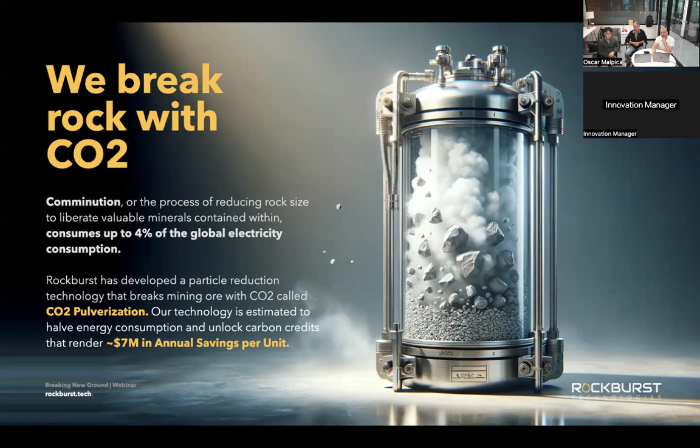Again, for this audience, you're pretty familiar with what you see on screen, but what we are trying to do is, in a way, replace mechanical comminution. This is a long-term objective, but nonetheless, we believe that this is the future of comminution in general, not just in the mining industry, but outside of it.

The opportunity is huge for all investors out there in the audience. This is at least a $30 billion annual global opportunity.

This is a summary of what we normally present as our key benefits in terms of what our technology can deliver. Energy savings — we have some early estimates of around half energy savings compared to ball mills and SAG mills. Cliff will explain a little bit more about where exactly we are in terms of these estimates.

This translates roughly into potential to decarbonize the mining industry around 3 gigatons per year. This is considering that we use CO2 as a working fluid in our technology, and that CO2 could also translate potentially into carbon credits, because that CO2 gets sequestered in the tailings of our process.

Again, you're seeing here early estimates, so please don't hold me to this just yet, but very, very positive indicators of where the technology could go in the future.

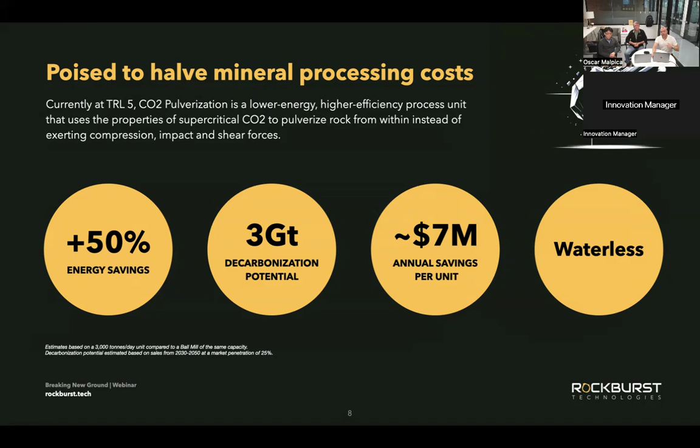So before we get into how this technology works, this is a quick video that shows the innards of some of the prototypes that we already have. If you haven't seen this video, it's just a 30-second video, but maybe we can have some commentary from the inventor of the technology, Cliff Edwards himself.

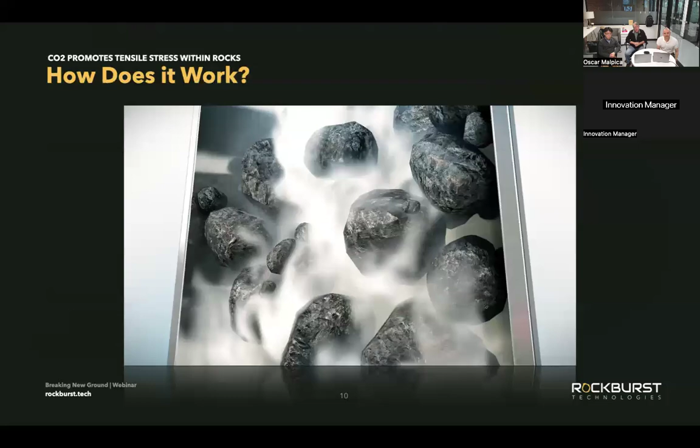Yeah, this is a very basic animation just showing, introducing the rock into a sealed chamber where you introduce the CO2 into that chamber and you permeate that CO2 into the pores of the rock in a supercritical condition. And then you rapidly decompress the chamber, which causes the pressure to increase inside the rock versus outside and fracture the rock. And thus you can turn your rock into your product size, and out comes the powder.

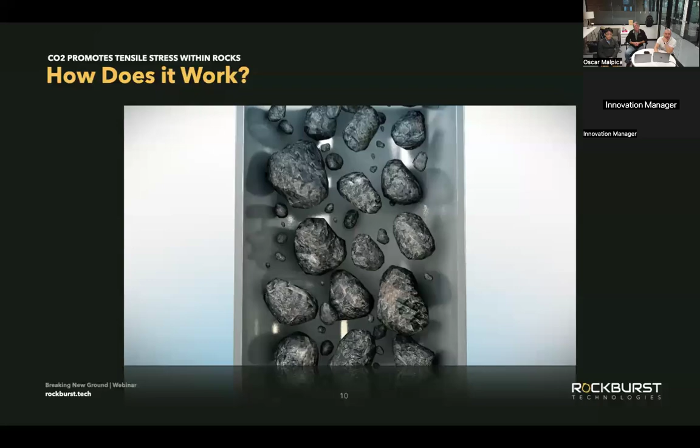Yeah, so once again, just to recap what you just saw here very quickly, what we're doing here is promoting tensile stress within the rock. And this is an important aspect because, again, rocks are 10 to 30 times weaker under tension than under compression. Again, for this type of audience, I'm pretty sure you all know this, but using this thermodynamic way of breaking rock, we're basically taking advantage of that fact of nature in a way.

Obviously, the devil is in the details in how to manage those thermodynamic levers that we have to move to get that breakage at the lowest energy threshold, relatively easily achieved in the lab. As you scale up, you have other nuances that we have to obviously take into consideration, and that is exactly what we're doing at the moment.

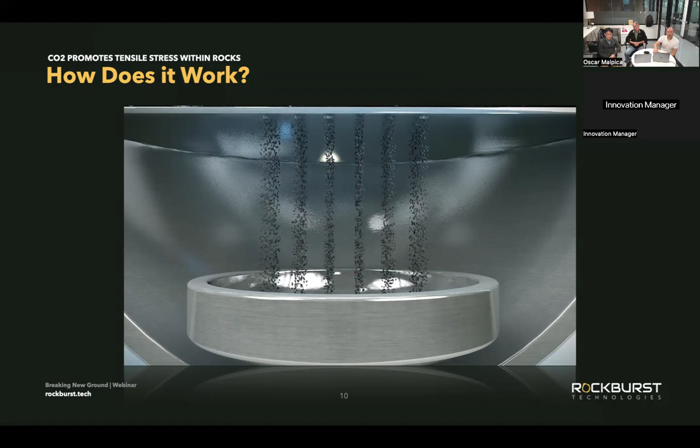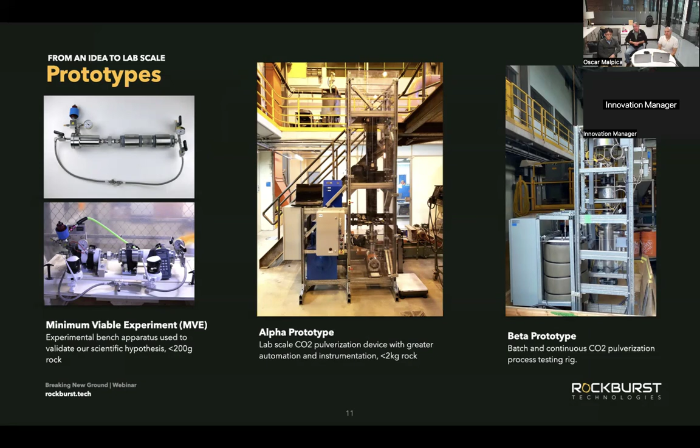But these are the 3 prototypes that we have at UBC, and you will see later down the road here that we have some results to show you in terms of what we have achieved for different types of ores. We'll be using the alpha and or the beta in the mineral liberation analysis program and study that we're promoting here, and those are the rigs that we'll use to do the comminution prior to doing the MLAs.

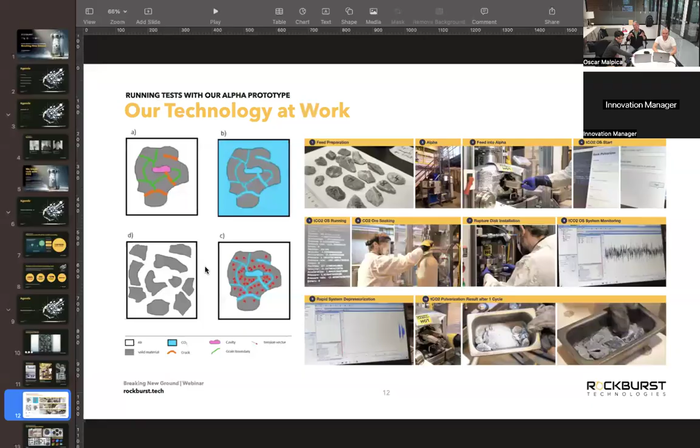And then in the next box, B, to the right, we show permeating with CO2, which works its way into the particle and through all those porous features. And then in C, we create, nope, on the right. Oh, yeah, sorry. So in C, we create the tensile stress by rapidly lowering the pressure around all the particles at the same time. And then the stress is created from the pressure that's still remaining inside the rock, as the gas hasn't had a chance to escape at the same rate that we decompress around the rock. Thus, in D, we fracture the rock along all those porosity features.

And then, if you want to zoom back a little bit, guys, you can see the test process on the right-hand side, where we prepare and characterize the feed. We load it into our test rig. We run our operating system for the test rig and add CO2 into the chamber. We prepare a rupture disk in the alpha, and then we run the system and do a rapid depressurization in the bottom left there, and then we vent the gas at this point.

Later on in commercial systems, we won't vent the gas, we'll recycle it. In this case, in the lab, we're venting the gas, and then we retrieve the sample, and then characterize the breakage results of the sample.

Yeah, one thing that we should probably mention at this point: this is obviously a batch approach that you're seeing here in our alpha prototype. However, we're studying different ways of converting this batch process into a continuous process. And the beta prototype, the next generation prototype that I showed in the previous slide, is allowing us to test certain aspects of continuous processes. So just to mention that this is an evolution of how we see this technology progressing.

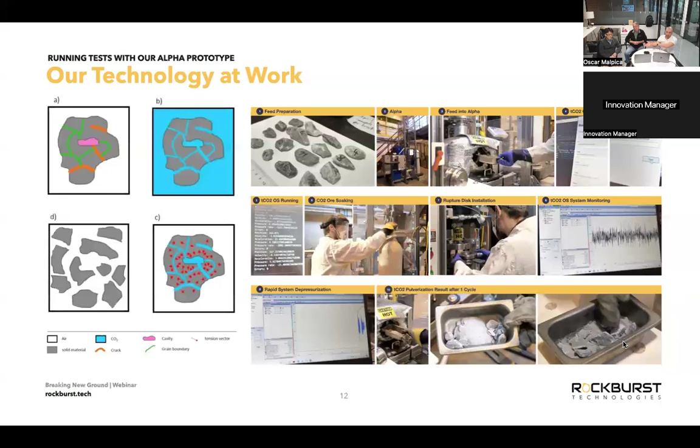And these examples are just showing one cycle of our process, where you put the feed in and you do that one breakage, a rapid depressurization breakage cycle, and you produce a certain amount of fracture across the size ranges, but some of that fracture is going to be at the product size that you want, say sub 100 micron. And then the oversize, of course, goes back in for another cycle.

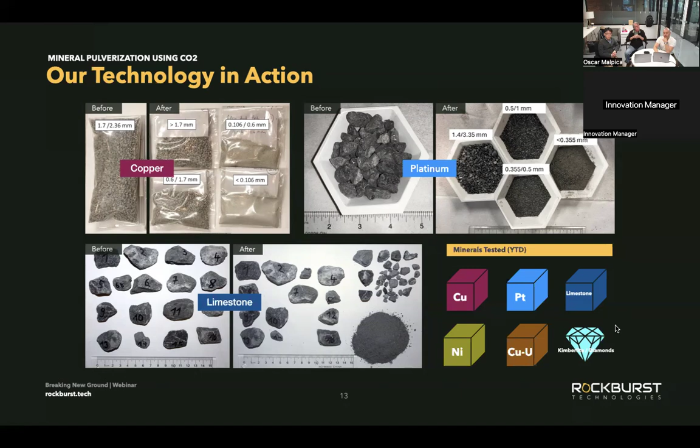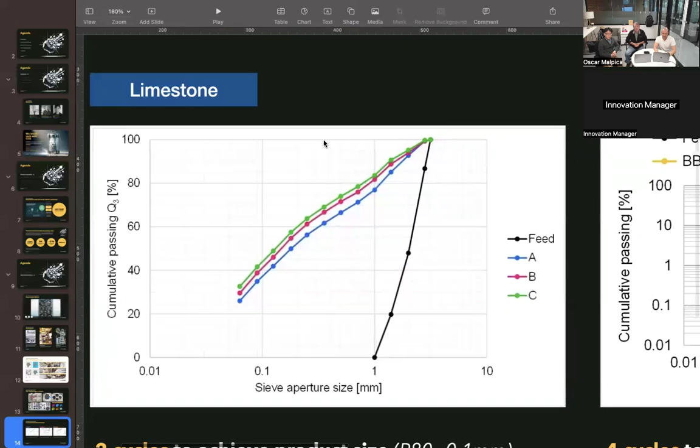This is an example of particle size distribution charts to back up the pictures of the products that we produce from the feed. These are intended to show our breakage performance. These are showing individual cycles. So each chart has a black line which shows the feed size, and these sizes are all produced by taking first the feed, the black line, and then the products, the colored lines from the tests, and putting them in sieving machines and sieving them at different sieve sizes so that the mass of the particles that pass through a certain sieve size can be determined and then charted here.

So you've got sieve size on the bottom, in millimeter scale from 0.01 millimeter, so 10 micron, all the way up to 10 millimeters. And then on the vertical axis, you've got cumulative passing. And that's just a common way of saying the mass of material that passes the sieve at that size.

So in this case, the feed was obviously 1 millimeter to 3 millimeters in size at 100%. And then the products from each of these three test cycles show that if you were targeting, for example, say a 100 micron or 0.1 millimeter size fraction on this chart, we're getting 40% of the mass of material passing that size pretty much for each test cycle.

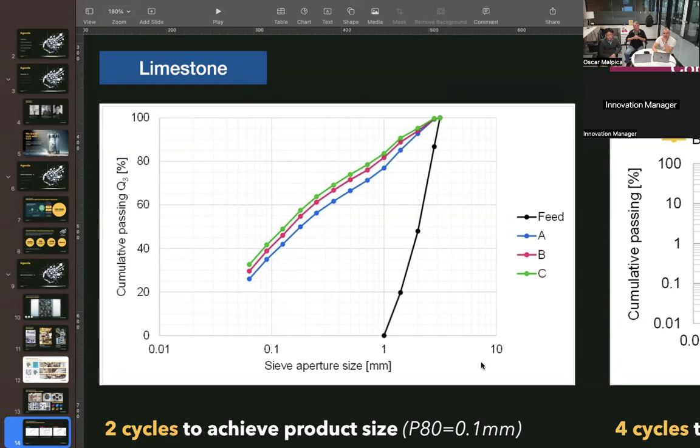And then the next chart is a copper example. And in this example, we've got the black line again showing the feed. The feed was actually 1.7 to 2.36 millimeter. It tapers off because the sieving itself produces some small amount of fine fraction. So you can ignore that long tail on the black line there. But the colored lines here represent 2 different test rigs.

So the blue line is our alpha test rig. It's an earlier test that we did with this material, showing about 2% cumulative passing at 0.1 millimeter. And then we show results from our beta apparatus on the same material, and you can see that it's pretty much a 10x improvement in breakage performance. So this is partly to give you an example of the comminution performance we get per cycle, but also to show the progression that we're getting with our generations of equipment. And the beta is not the end. We will continue to optimize and push these numbers up.

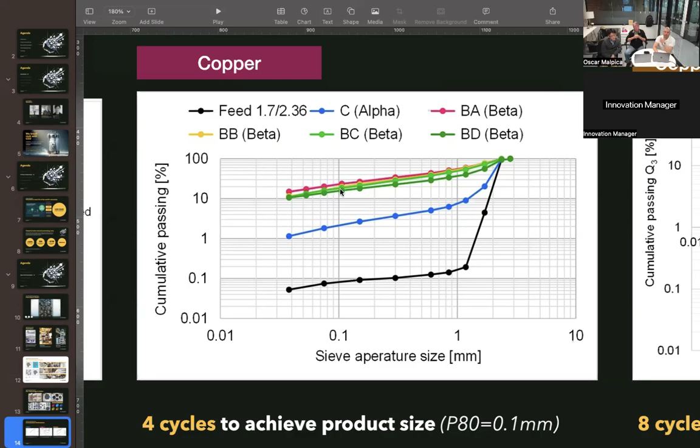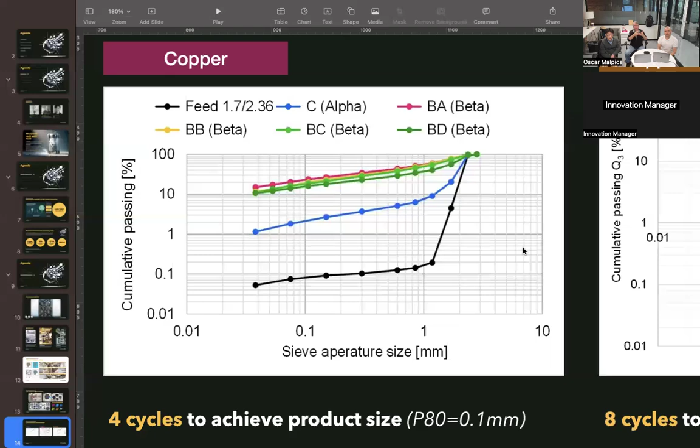It's a bit hard at this moment to translate this slide into an energy comparison with traditional means, but we model these results through a thermodynamic model we have of a sort of conceptual process at a larger scale, and that's where we're coming up with our estimations for energy.

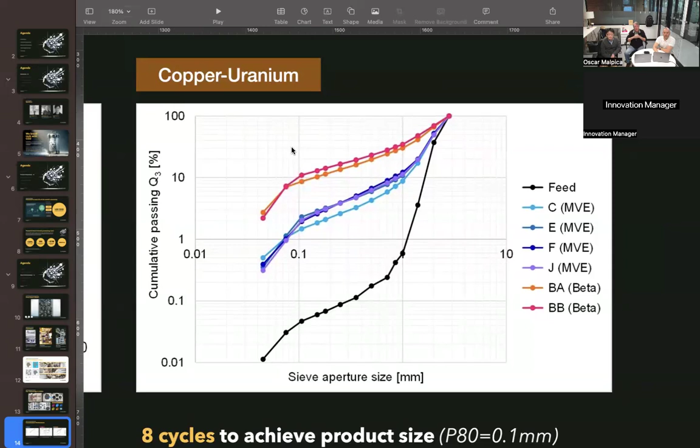So the last one here is copper uranium ore, very hard ore, quite challenging to break. The feed looks like it was essentially 1 millimeter to 3 millimeter roughly. And again, we've got an old test apparatus with that bundle in the middle of colored lines showing about 2% breakage at the 100 micron size. But then we're also showing the beta results at around the 10% mark. So in other words, again, with this one, to reach a P80 of 0.1 millimeter, you would need to run, say, 8 cycles, and that would push that up to the P80 mark. And for us, when we run these number of cycles and the pressure and temperature and so on through our thermodynamic calculator, we can see what looks like very promising energy results.

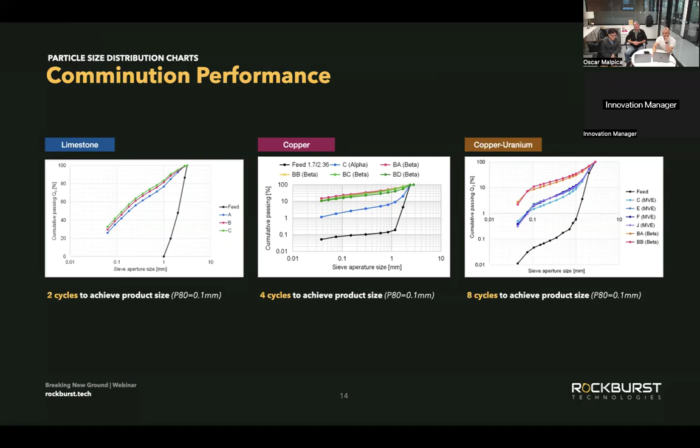Again, electricity consumption would decline. This is what we expect to see in large, scaled up systems. The devil's in the details; we still have to work with our engineering partners to make it so. And then you have, once again, dry comminution is the default mode of our technology. And there is the potential for carbon sequestration from our side because we use CO2 as a working fluid.

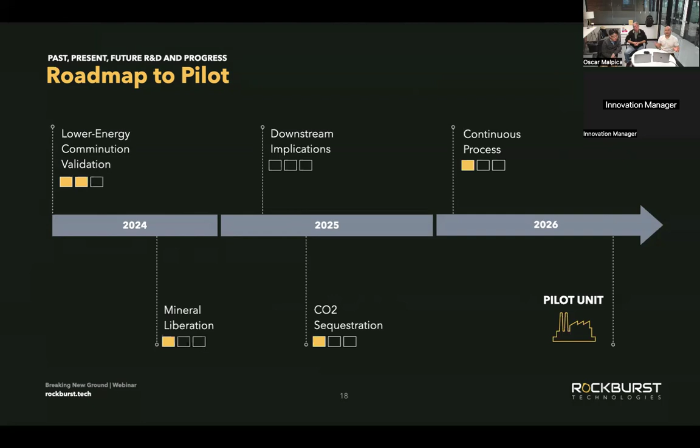To get there, we need your help. And that's why we're running this mineral liberation analysis. But we have other aspects that we still have to fully understand and fully develop. And that's just the reality of when you're developing a breakthrough technology like this one. And what you're seeing here is basically the timeline, the pathway, the roadmap of all the other aspects that we need to de-risk to get a proper pilot design. And this will happen this year and next year.

Again, asking for your help. This is the reason why we're running this crowdfunding mineral liberation study. Three main objectives. Obviously, we want to validate our technology for liberating valuable minerals contained within ore in an easier way.

Cliff mentioned a little bit about the aspect of the kimberlite and diamonds, our technology showing evidence of breaking along grain boundaries. So we want to test that with a whole plethora of other ores, and that's why we're asking your help to participate in this study. Obviously, this will lead to optimizing mineral liberation the way we kind of see and understand it. But we want input from the industry.

Again, this is a crowdfunded approach. Not really sure this is something that has been done recently in the mining industry. Our experiments are quite expensive, and we have engaged certain mining companies, but we understand that in order for us to reach out to as many interested parties as possible, we need to run it in this manner. So this is the methodology for the study.

Very simple. We're going to be receiving shipped samples coming from mining companies, and we will develop a baseline comminution with either a ball mill or an HPGR technology, so we have a baseline to compare to. And we're going to be processing that ore that we receive with our own technology. That will be sent out to McMaster University. They are going to be the ones doing the mineral liberation analysis. They have all the nicer toys over there.

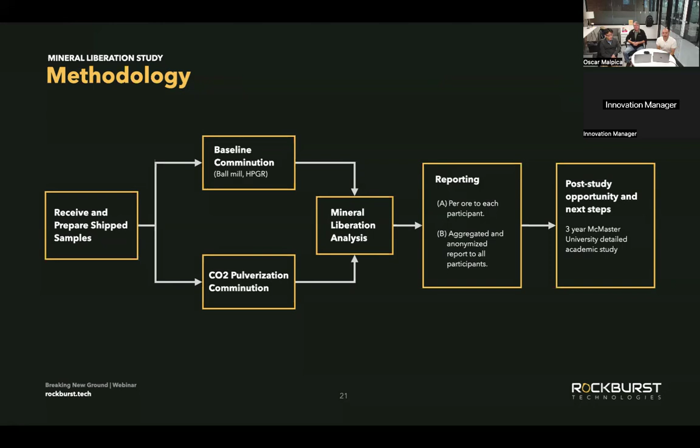And then we're going to be working on two reports: one full detailed report per participant, and one library aggregated and anonymized data report sent out to all participants of this study. And then we will have a post-study opportunity for those who are interested in knowing whether we're actually saving either energy or potential GHG reduction with their ores.

You will have priority in terms of technology rollouts in the future. And you will also have the option for customized analyses. Obviously, we will provide a number of shout outs to you and your team as an innovation supporter. Again, this is a breakthrough technology from Canada, so proud to say so. And we will send you a quarterly newsletter so you keep tabs on what is happening.

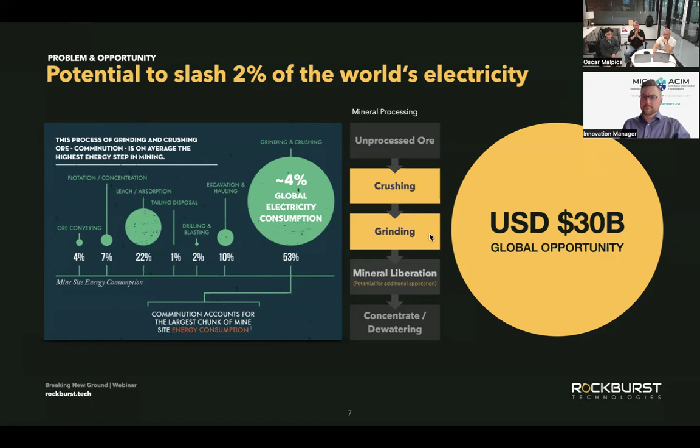There was a second part to that question, Kyle. Can you repeat it? What throughput do you envision this technology could be capable of? Right. That is going to be the key question as we scale the technology. We haven't got there yet, although we've been working on it from a conceptual point of view for several years. We believe that we can make this work as modular units or pods that can achieve meaningful amounts of comminution, say 1 million tons per year, and then scale those by repeating the units.

So it'll be likely, at least in the initial years of its rollout, modular units that can be scaled by increasing the number of modules. But I know that the largest mines in the world process very large amounts of material per day. And in the future, who knows? We may have to look at scaling this technology to the big plant scale, of which there are, I think, examples in industry that can support quite large throughput. So I think that our target right now is looking at like a 3,000 ton per day unit, which is about 1 million tons per year.

Great. And so I think, yeah, modular is certainly the way to go with something like this. What are the typical compressive strengths of each of these raw ores, please? Oh, I don't have those numbers on the top of my head, but we've looked at the literature, and you can find that literature through searching online, and you can even find tables of the different types of rocks and their typical compressive strength. Of course, every sample of even the same material of rock is going to have a different result. So when you do those kind of tests, you have to test a lot of material and then sort of average it out.